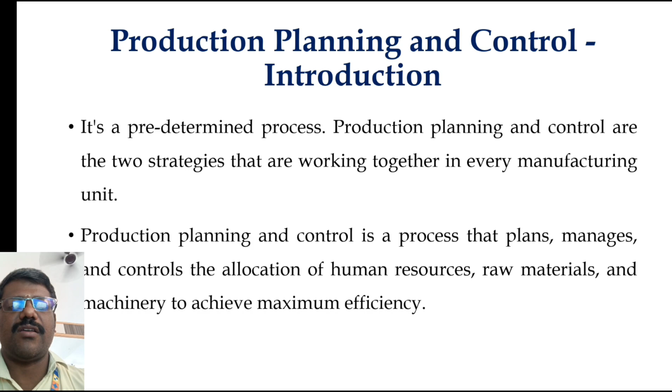Introduction. It is a predetermined process. Production planning and control are two strategies working together in every manufacturing unit. Production planning and control is a process that plans, manages, and controls the allocation of human resources, raw materials, and machineries to achieve maximum efficiency.

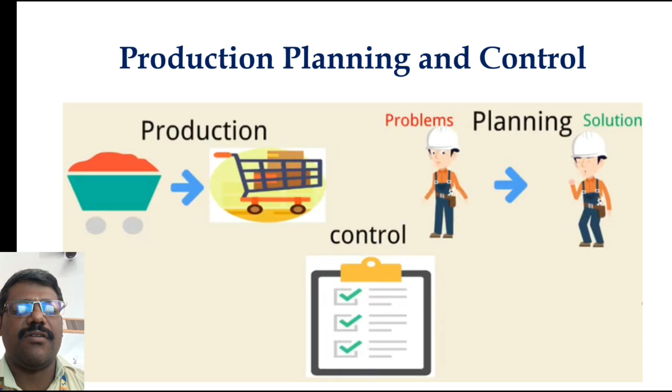See this picture: production is the process from raw material into finished goods, under the control of production. In production, planning departments identify problems and give solutions for them. Then the next one is control. Control means controlling all the processes in production and manufacturing units.

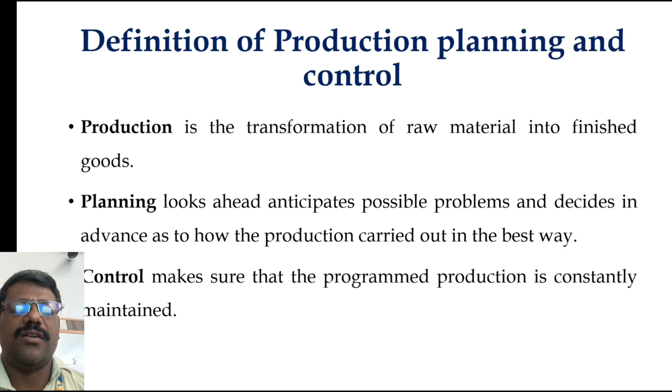Next, definitions of production planning and control. First, production: production is the transformation of raw material into finished goods. Planning looks ahead, anticipates possible problems, and decides in advance how production should be carried out in the best way. Next, control: control makes sure that the programmed production is constantly maintained.

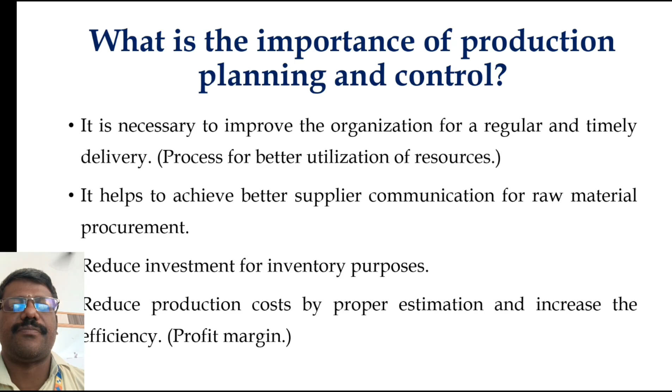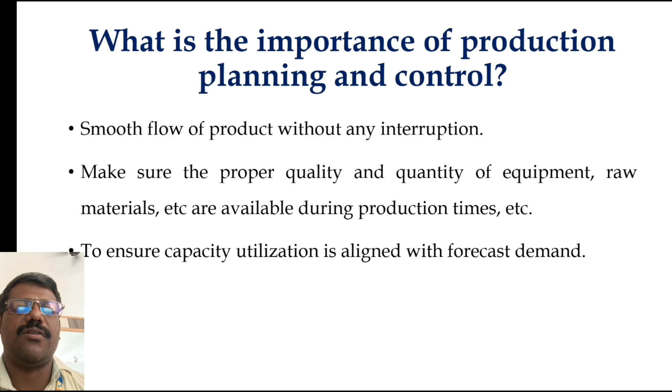Next, smooth flow of product without any interruptions. Make sure the proper quality and quantity of equipment, raw materials, etc. are available during production times, to ensure the capacity utilization is aligned with forecast demand.

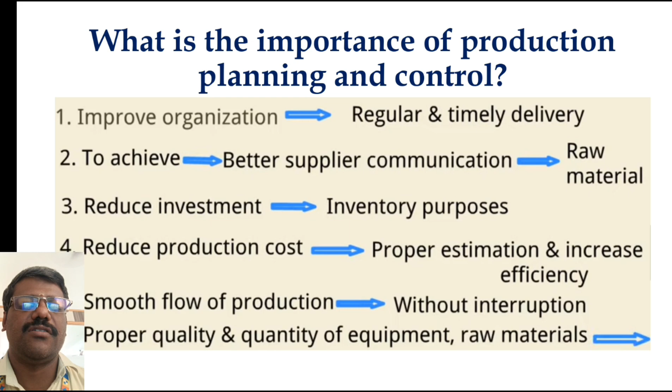This picture clearly shows the importance of production planning and control: improve organization with regular and timely delivery, achieve better supplier communication for raw material, reduce investment for inventory purposes, reduce production cost with proper estimation and increase efficiency, smooth flow of production without interruptions, and proper quality and quantity of equipment or raw materials into finished goods.

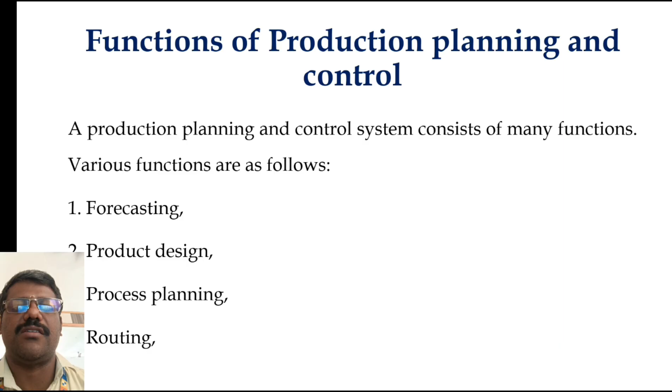Next, functions of production planning and control. Production planning and control consists of many functions. The various functions are as follows: forecasting, product design, process planning, routing, material control, tool control, loading, and scheduling. We'll discuss these one by one.

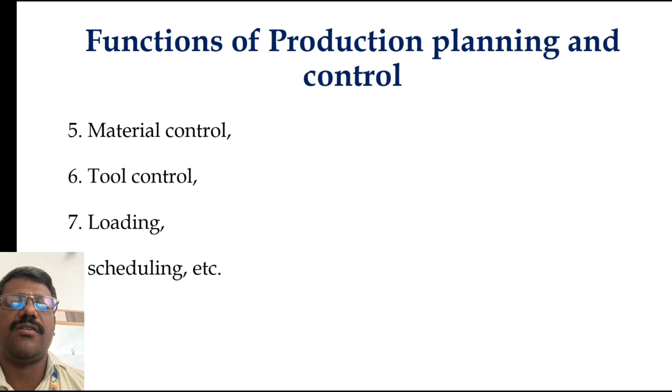First, forecasting. Forecasting is the process of making predictions of future data—type, quantity, quality, sales—based on past data by analysis of trends. Every manufacturing enterprise survives on its ability to assess with reasonable accuracy the market trends a year ahead. Forecasters make use of sales trends, but this must be considered in light of expected introduction of new materials, fashion and technological changes, policy of competitors, unseasonable weather, and economic situations of countries and foreign markets.

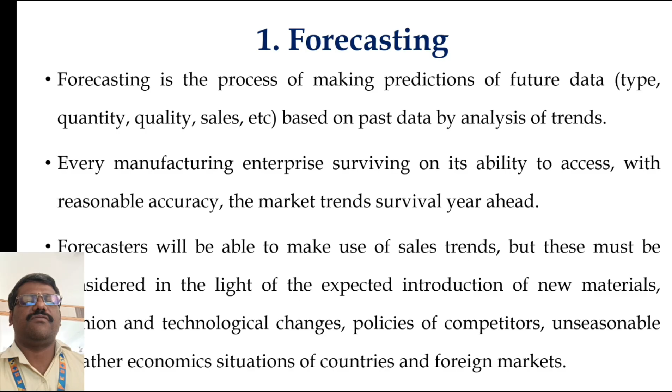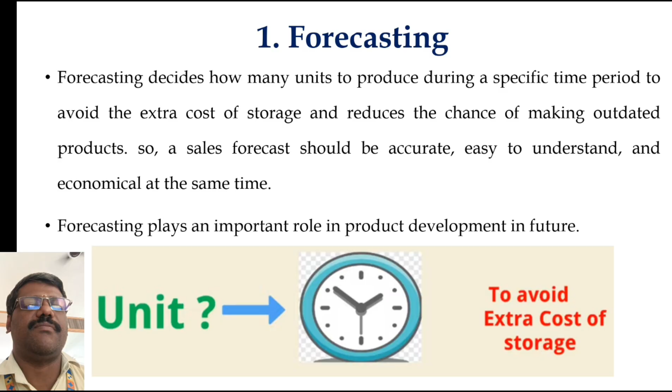Next, product design. Before starting to manufacture a new product or improve an existing one, it is essential to design the product first. The design department modifies and extends the range of an original idea. The design department consists of designers, engineers, and draftsmen.

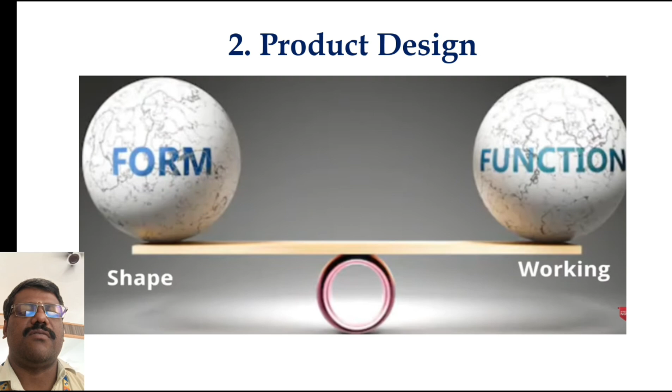See this in the following pictures. The design department includes designers, engineers, and draftsmen. Next, product design deals with both form and function. Form design takes care of the shape of the product, and functional design deals with its working. Form gives shape, function gives working.

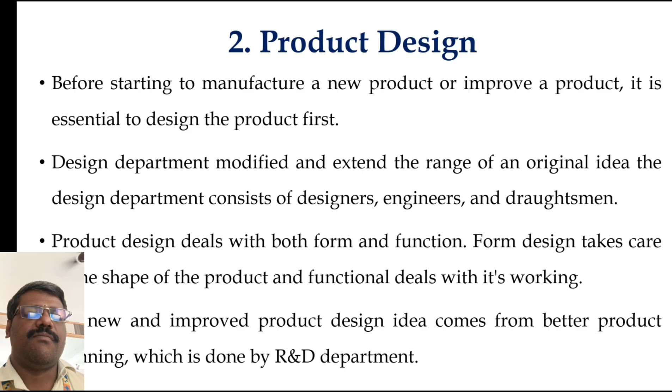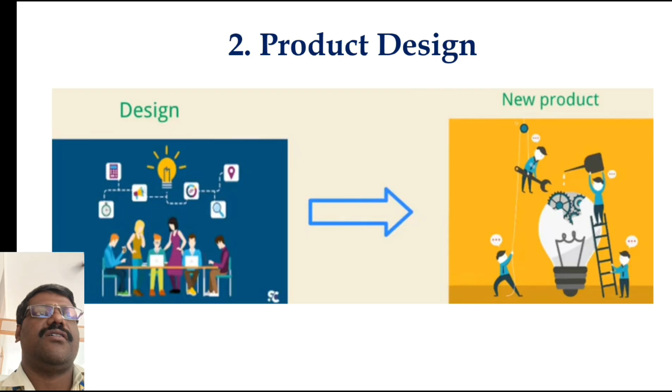For a new and improved product design, ideas come from better product planning, which is done by the R&D department. The design department includes designing a product and completing new product development.

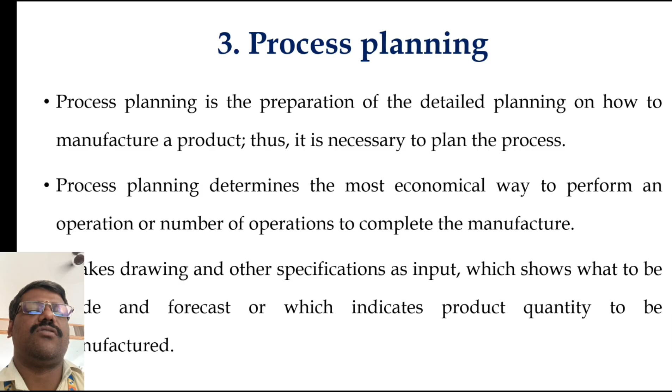Next, process planning. Process planning is the preparation of detailed plans on how to manufacture a product. Thus, it is necessary to plan the process. Process planning determines the most economical way to perform an operation or number of operations to complete the manufacture. It takes drawings and other specifications as input, which show what is to be done, what is to be made, and indicates the product quantity to be manufactured.

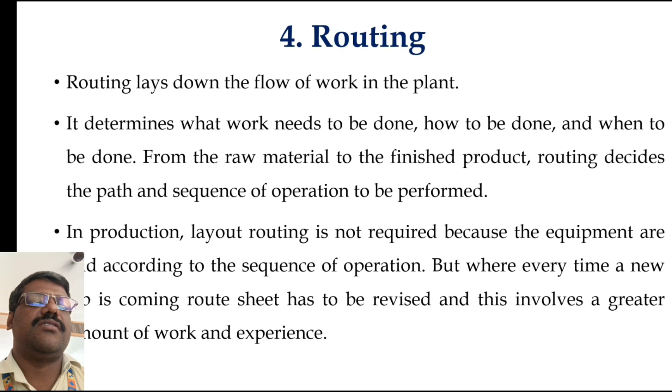Next, routing. Routing lays down the flow of work in the plant. It determines what work needs to be done, how it is to be done, and when it is to be done. For converting raw material into finished products, routing decides the path and sequence of operations to be performed. In production, layout routing is not required because the equipment is laid out according to the sequence of operations. But whenever a new job comes in, the route sheet has to be revised, and this involves a greater amount of work and experience. This is the flow of work in the plant, called routing - what work needs to be done, how it is to be done, when it is to be done, the sequence of operations and path - that is called routing.

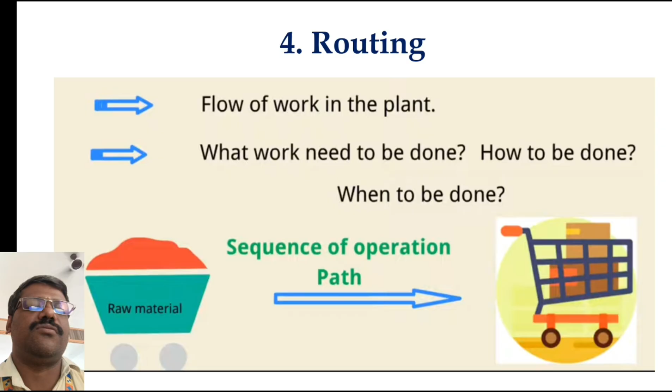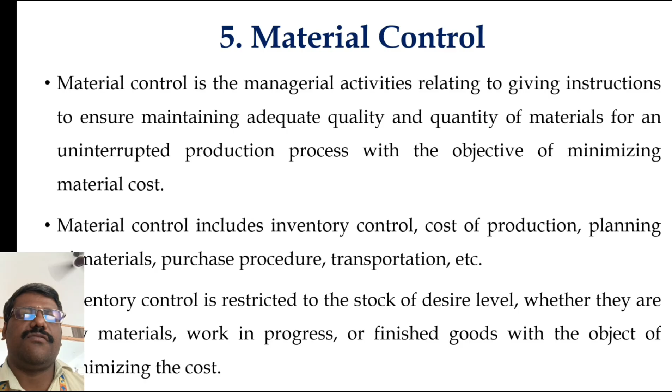Next, material control. Material control is the managerial activity related to giving instructions to ensure maintaining adequate quality and quantity of material for an uninterrupted production process, with the objective of minimizing material cost. Material control includes inventory control, cost of production, planning of materials, purchase procedure, transportation, etc. Inventory control is restricted to the stock desired level, whether it is raw materials, work in progress, or finished goods, with the objective of minimizing the cost. This is to maintain adequate quality and quantity while minimizing material cost.

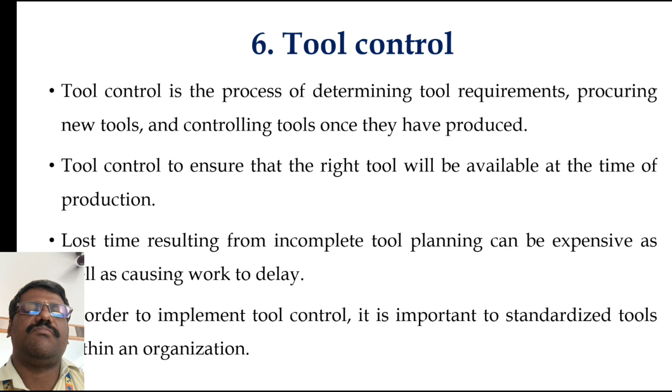Next, tool control. Tool control is the process of determining tool requirements, procuring new tools, and controlling tools once they have been produced. Tool control ensures that the right tool will be available at the time of production. Lost time resulting from incomplete tool planning can be expensive as well as causing delays. In order to implement tool control, it is important to standardize the tools within an organization - that is, tool requirements, procuring new tools, and controlling the tools.

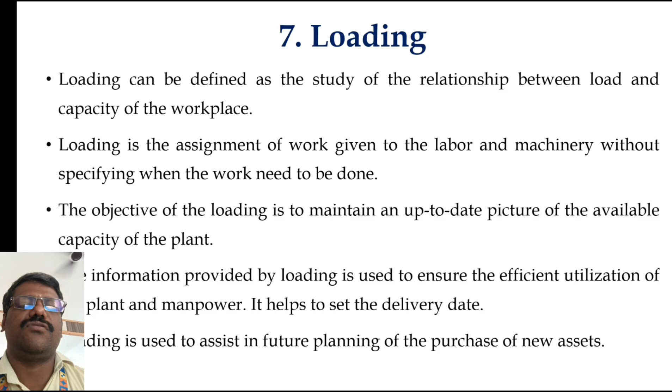Next, loading. Loading can be defined as the study of the relationship between the load and capacity of the workplace. Loading is the assignment of work given to labor and machinery without specifying what work or when the work needs to be done. The objective of loading is to maintain an up-to-date picture of the available capacity of the plant. The information provided by loading is used to ensure efficient utilization of the plant and manpower. It helps to set the delivery date. Loading is used to assist in future planning of purchase of new assets. Loading can be defined as the study of the relationship between load and capacity of the workplace - an assignment without specifying when the work needs to be done.

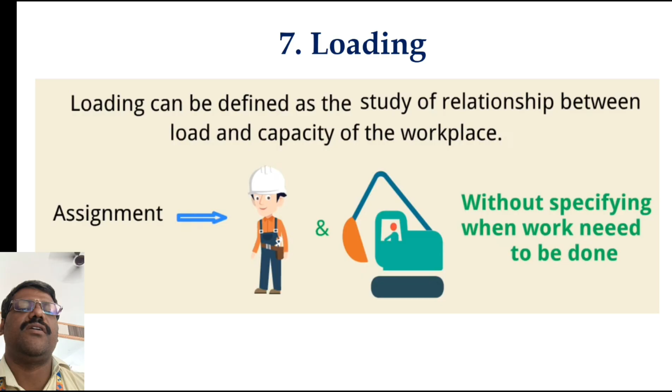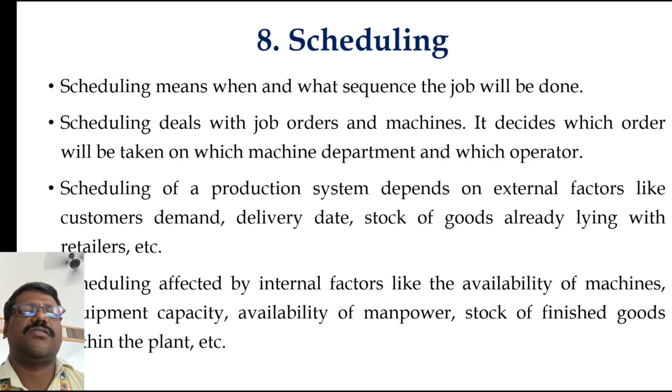Next, scheduling. Scheduling means deciding when and in what sequence the job will be done. Scheduling deals with job orders and machines. It decides which orders will be taken on which machine, department, and by which operator. Scheduling of the production system depends on external factors like customer demand, delivery date, and stock of goods already lying with retailers. Scheduling is also affected by internal factors like the availability of machines, equipment, and capacity, availability of manpower, and stock of finished goods within the plant, etc.

These are the functions of production planning and control. Thank you.